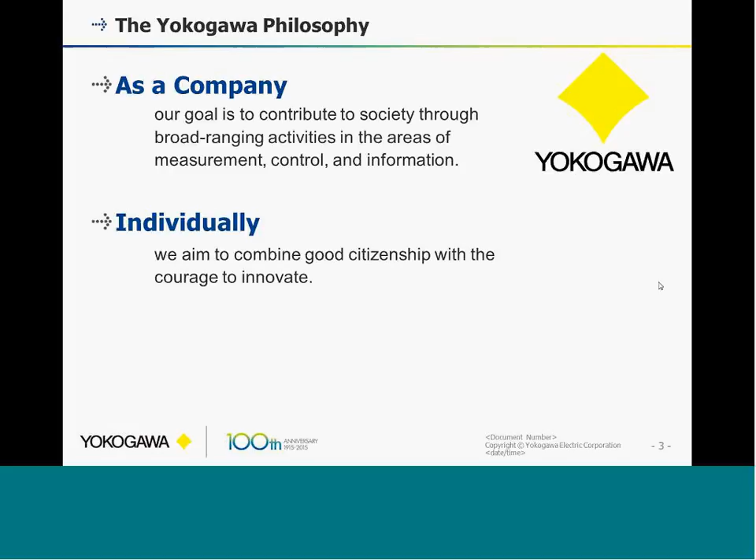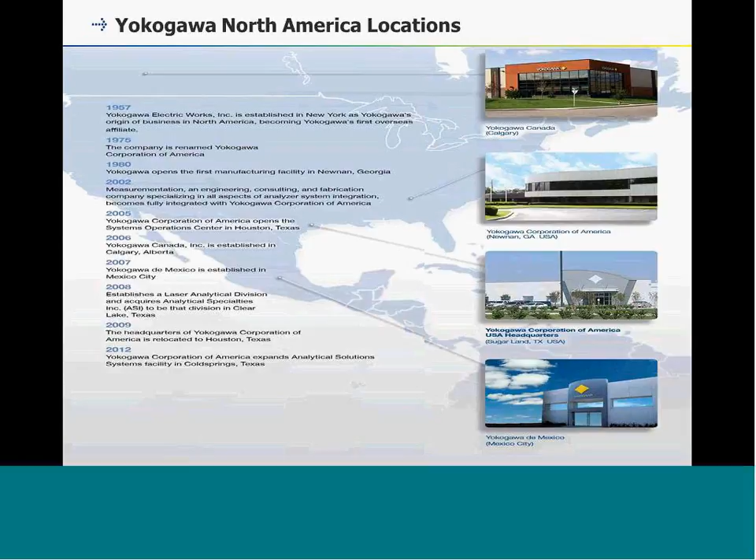Really quick, for those of you who may not know anything about Yokogawa, I wanted to give a brief overview of who we are as a company. Our goal is to contribute to society through broad-ranging activities in areas of measurement, control, and information. Individually, we aim to combine good citizenship with the courage to innovate. We started in 1915, and we operate in 33 different countries through 85 different companies. Within North America, we have 4 headquartered offices: one in Calgary, Canada, one here in Newnan, Georgia, just south of Atlanta, one in Sugar Land, Texas, and one in Mexico City.

Just within the U.S. alone, we have sales offices and people in your backyard all over the U.S., same thing for Canada and Mexico.

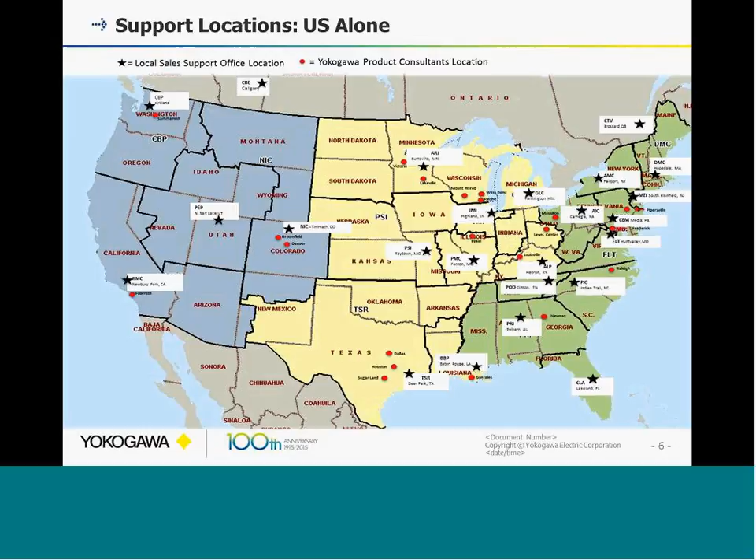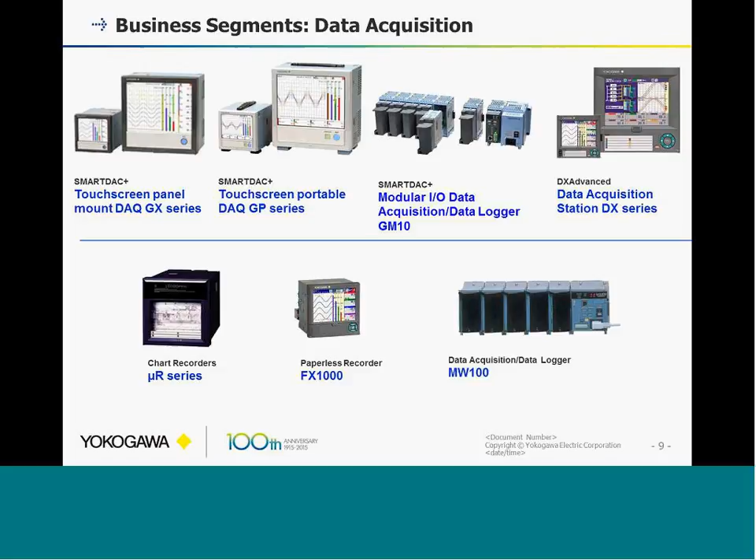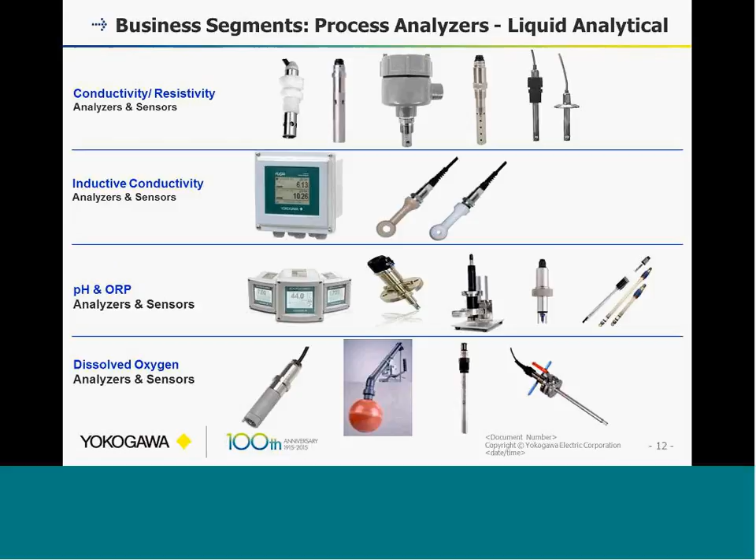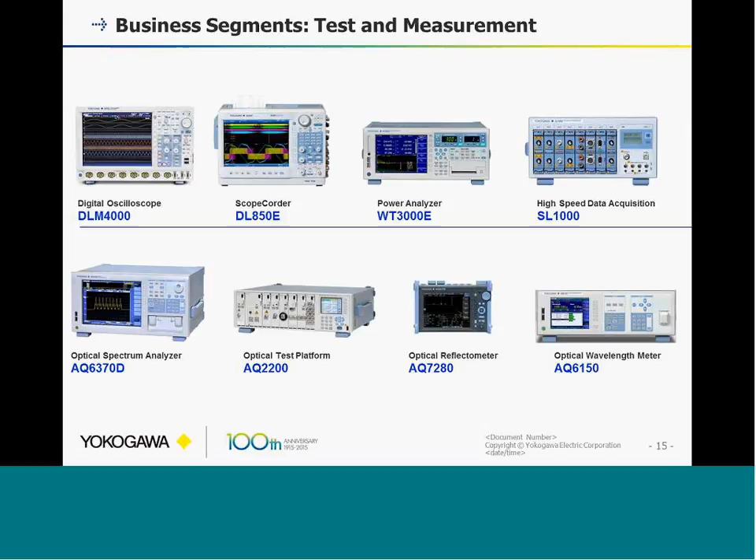From control and safety systems to your field instruments, your pressure and temperature transmitters, to your data acquisition and recorders, to your controllers, to gas analytical like your GCs, your zirconia oxygen, to your liquid analytical, conductivity, pH, dissolved oxygen. We also have a system integration group that builds sample systems called measurementation. We have a semiconductor division, a test and measurement division, and meters with handhelds for your calibrators or your insulators. We have a life science division as well.

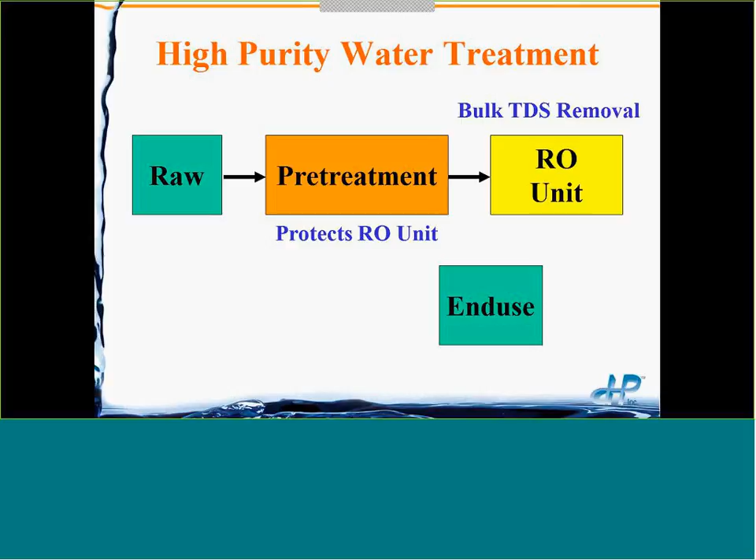But the unit can have problems like scaling, fouling, and chemical attack. So we have to protect the RO unit from those 3 problems, and that's called pretreatment. So pieces of equipment, the treatment steps ahead of the RO unit, are called pretreatment. They're to protect the RO unit from scaling, fouling, and chemical attack. And then if the RO permeate, the water that passes through the membrane, doesn't meet end-use requirements, then we have to polish it to meet end-use requirements.

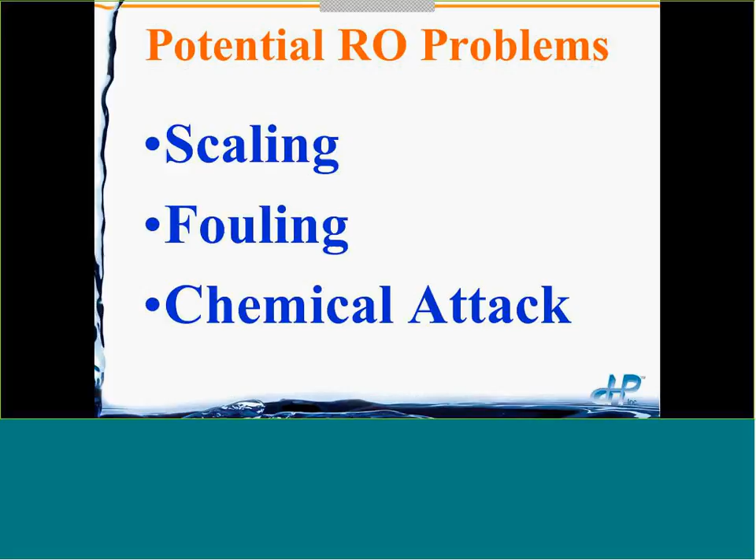And that is going to be the focus of the next webinar. We spoke previously in the two webinars about scaling, fouling, and chemical attack being potential RO problems. We also spent a good portion of the webinar time on monitoring RO units. We're going to monitor normalized permeate flow, and it'll drop for both scaling and fouling. I'm just giving an example here. If you want more information, go back to the previous webinar.

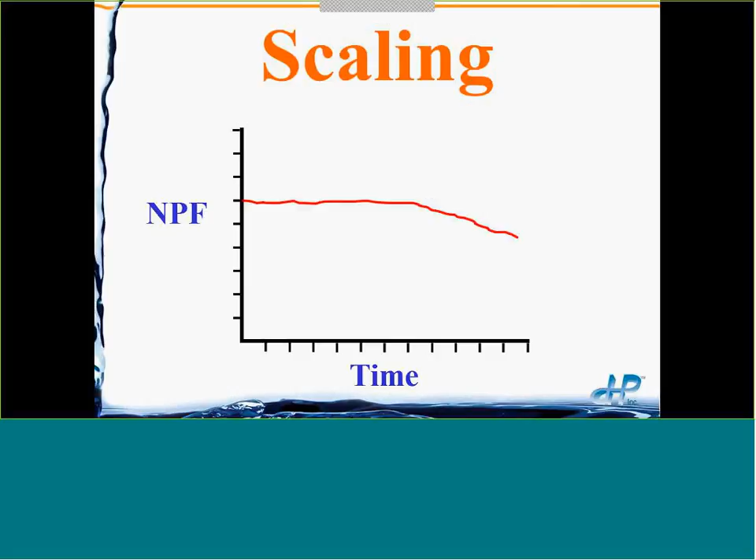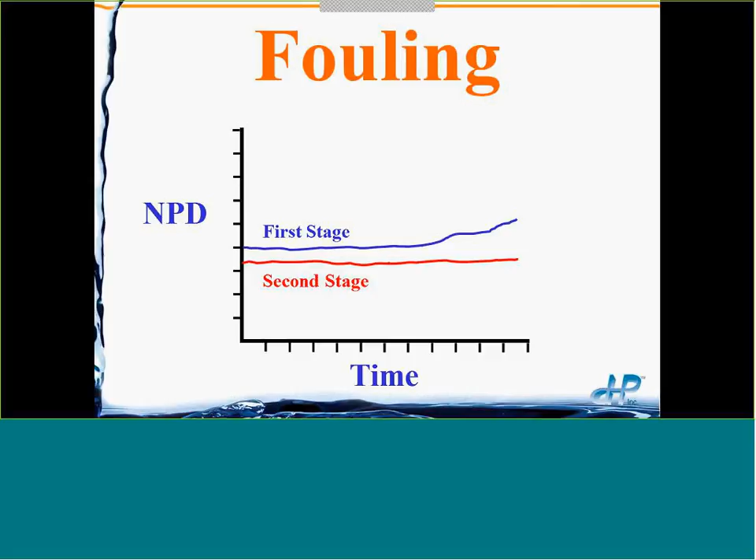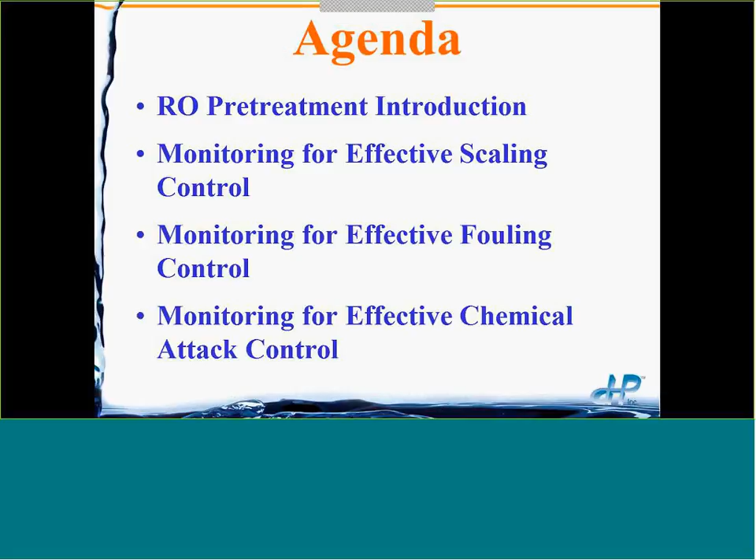Today I'll give an introduction on RO pretreatment, and then we're going to go over monitoring for scaling control, monitoring for fouling control, and monitoring for chemical attack control. RO pretreatment addresses scaling control, fouling control, and chemical attack control, because the purpose of pretreatment is to protect the RO unit from scaling, fouling, and chemical attack.

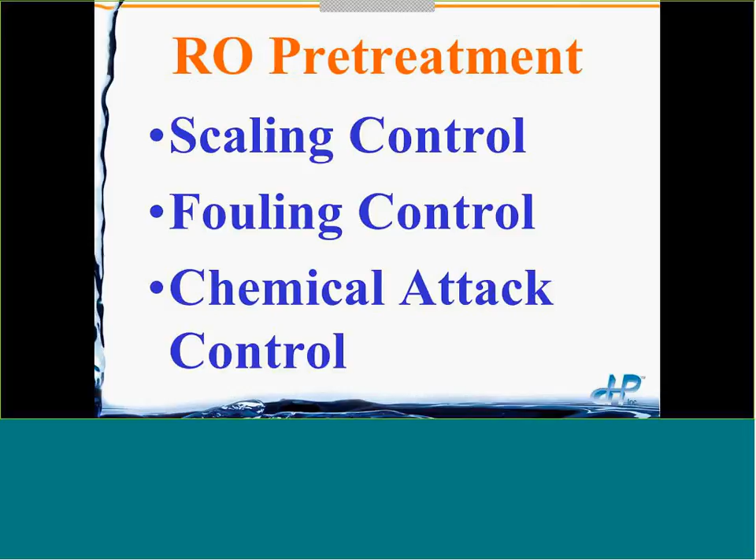So if you have a problem in an RO unit, you can't put blinders on and just look at the RO unit itself. If the unit is having a scaling, fouling, or chemical attack problem, then the pretreatment control really needs to be looked at, and that's the purpose of today.

In doing this monitoring, we would love to see normalized permeate flow as a straight line. That means the RO is operating today the same as when it was new and clean and everything was perfect.

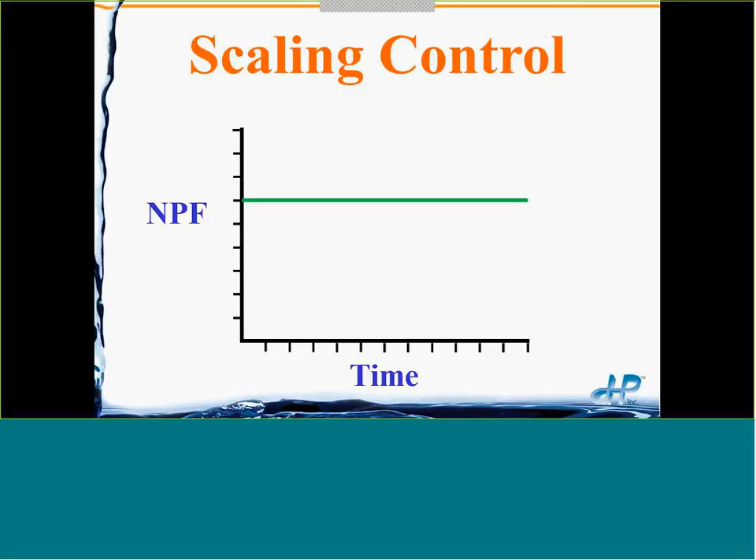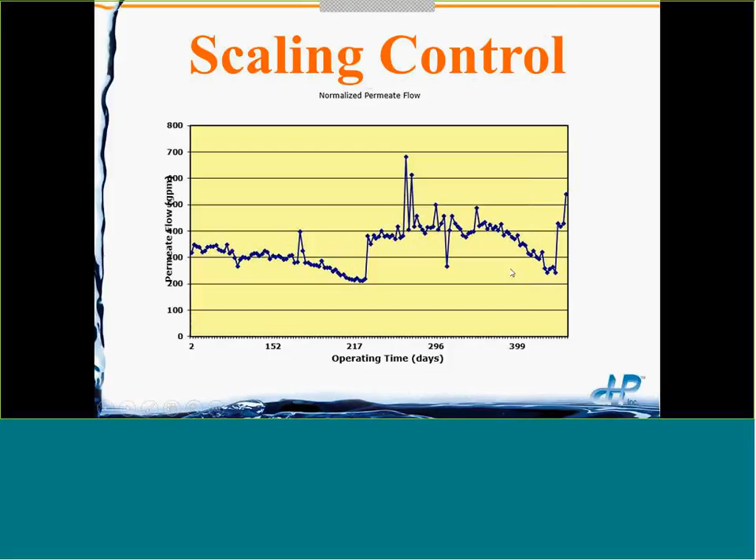But it never is a straight line. It looks more like this. In this case, we're seeing that the performance is dropping, the normalized permeate flow drops, but then we do a chemical cleaning and bring it back. So the line in this case is kind of jagged as scaling occurs, and then you clean it.

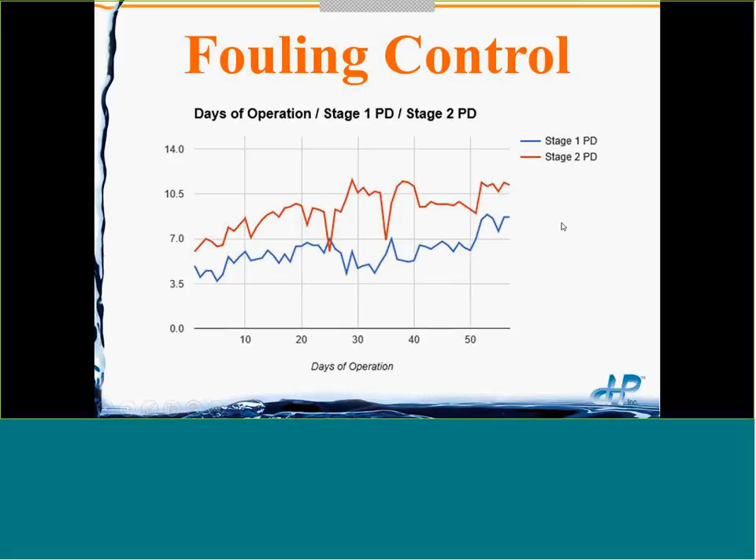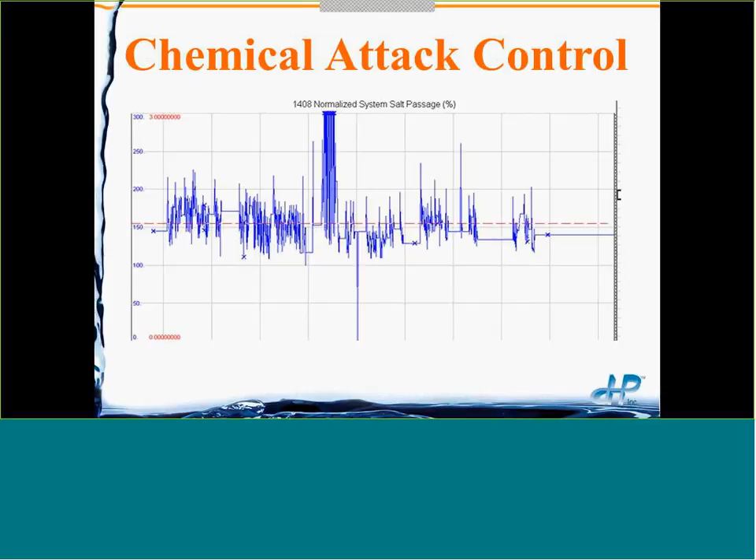For scaling, what are the common pretreatments today for controlling scaling? Acid injection is one, scale inhibitor injection is the most common, and softening is the third. Let's do a couple of slides on each one of these.

Acid injection for a polyamide thin film composite membrane is only for carbonate scale control. For the few that may have cellulose acetate membrane, it's very common that you have to inject acid because you have to have the pH around 5.5, as the membrane itself is hydrolyzed otherwise.

Most common, over 99% of all the membranes we're going to run into are going to be polyamide thin film. If you're injecting acid, you're injecting it for carbonate scale control.

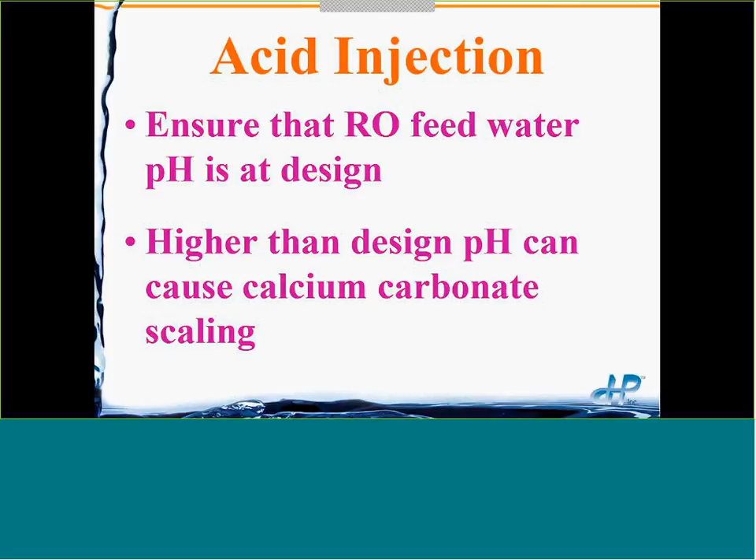The reason we want to do the monitoring and make sure the acid is being injected properly is we want to make sure that pH doesn't creep back up. Because if we have a higher pH than we actually want, that's going to increase the calcium carbonate scaling potential. That's why we're injecting acid, to get rid of the carbonate so you don't have calcium carbonate scaling.

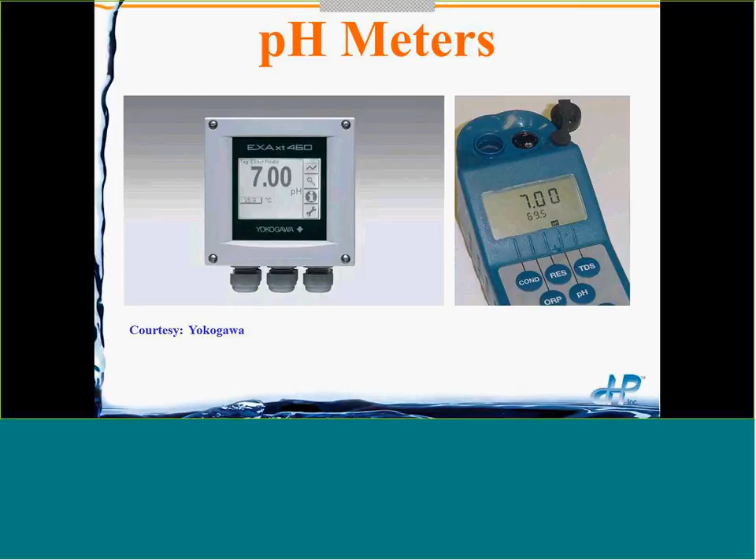So we're going to monitor the pH with on-stream instruments and also verify the accuracy of the on-stream instrument using calibrated handheld instruments. Acid injection is not so common, and it's only for carbonate.

If you have more than a carbonate scaling potential, you're going to have to use either scale inhibitor injection or softening. In this case, we're talking about inhibitor injection.

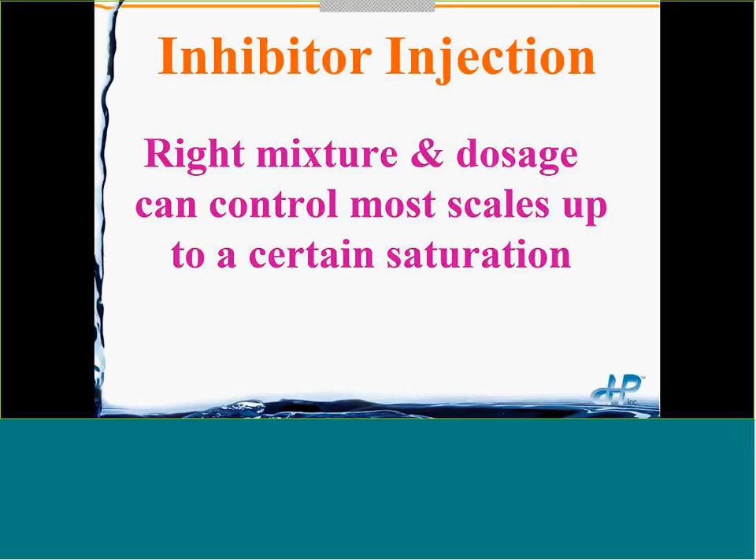Basically, the chemistry is well known, the scaling is well known, and there are many products you can use to control scaling of basically any scaling compound. But they only work to a certain level, a certain percent saturation.

So if you had no scale inhibitor, 100% saturation would be the absolute max. With a scale inhibitor, like for sulfate, maybe you can go to 250 or 300% saturation. But it still won't protect you if you went to 400 or 500% saturation.

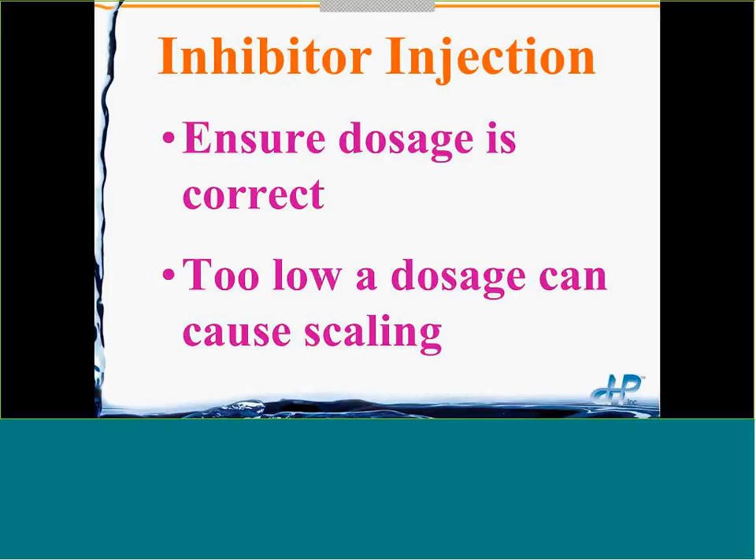As far as monitoring, we want to make sure the dosage is correct, that we're not adding too little. If we add too much, it's going to hurt our pocketbook—it probably won't hurt anything else.

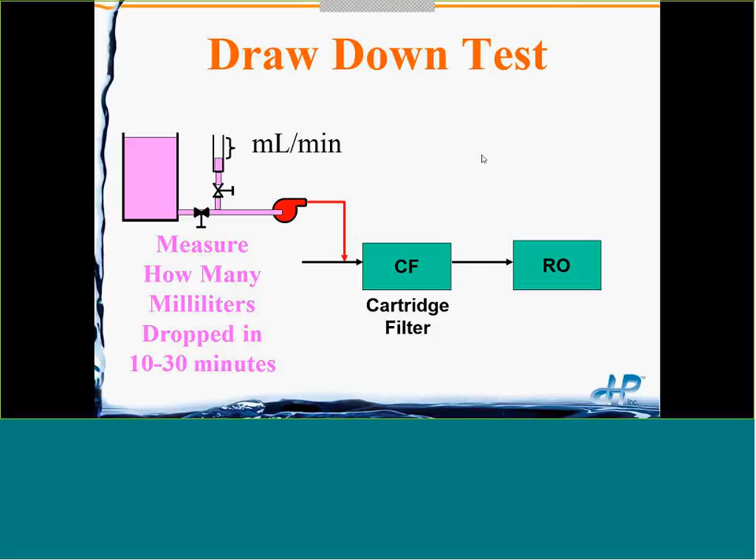So the monitoring for scale inhibitor dosage is a drawdown test where you have a graduated cylinder. You draw from the tank and then close the tank valve, and now you're sucking out of the graduated cylinder, and you can figure out how many milliliters per minute you're injecting, and based on the flow rate to the RO unit, you can determine the dosage. That's the best way for an injection.

The last one is softening, and softeners—everybody's heard of home water softeners. In the old days, they were called sodium zeolite softeners.

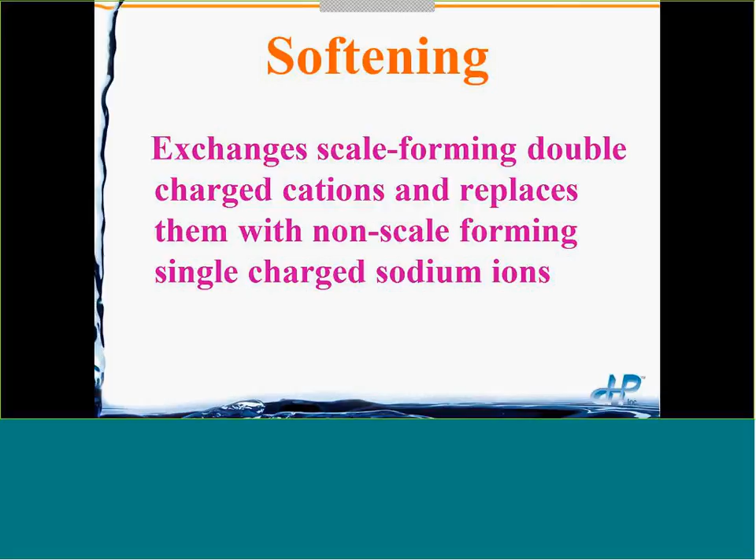These are ion exchange, so you have little beads, ion resin beads, and in this you're exchanging the scale-forming double-charged cations, those positively charged ions, and replacing them with non-scale-forming single-charged sodium ions. That's where you regenerate them with sodium chloride. Getting rid of the double-charged calciums, double-charged magnesiums, those are the main things, but also double and triple-charged ions like strontium, barium, aluminum, iron, things like that.

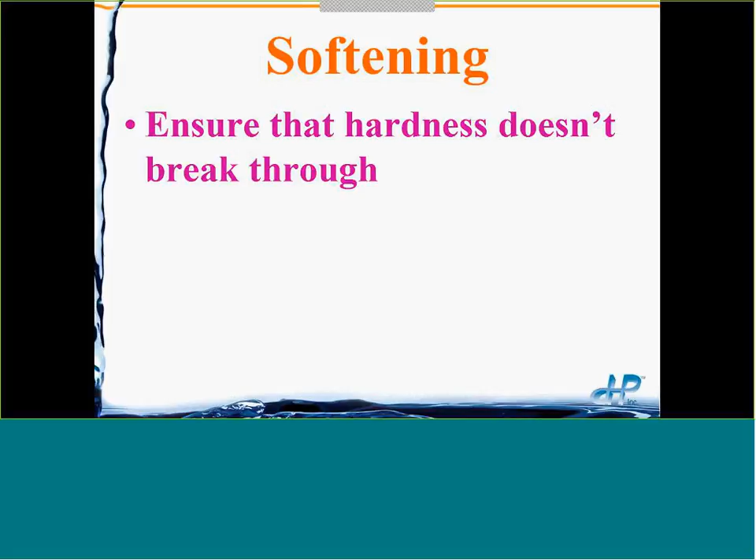As far as monitoring, we want to make sure that we don't have hardness breakthrough of calcium and magnesium, but it's actually the magnesium that comes out first. We make sure that it doesn't break.

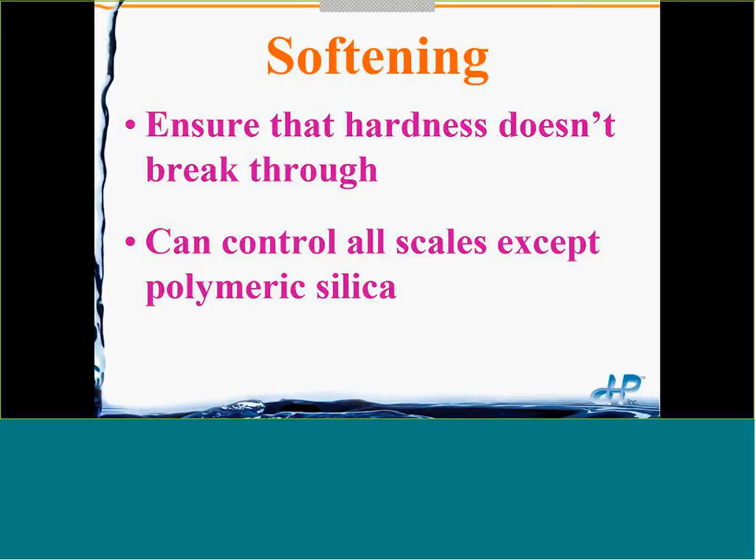The great softeners will remove all or most of the cations, so that you don't have to worry about cation-anion scalants such as calcium carbonate, calcium sulfate, magnesium sulfate, barium sulfate. Because you're removing the double-charged cations and converting them into sodium sulfate and sodium carbonate, and these don't scale.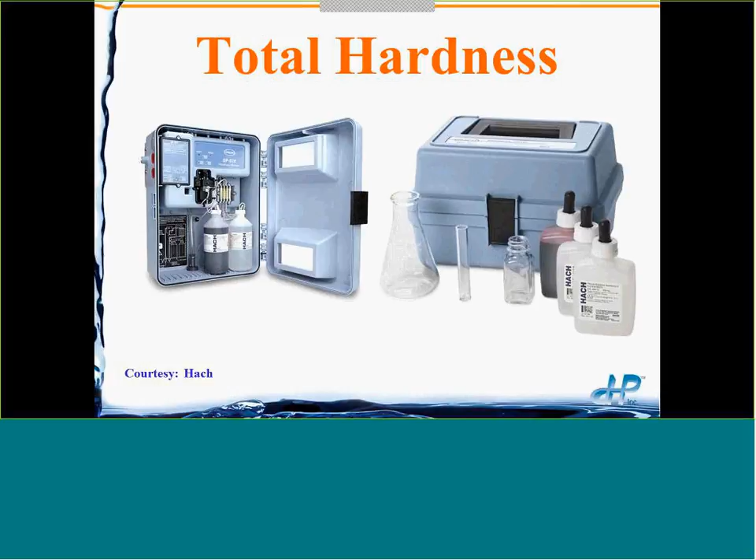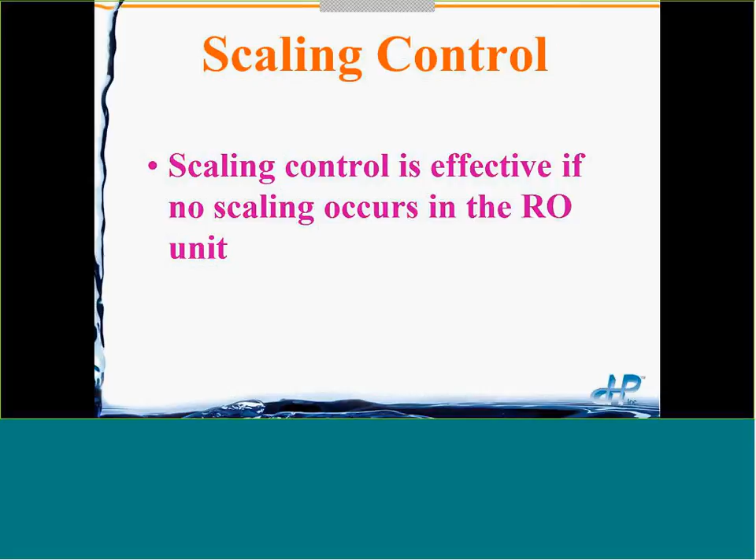Monitor again online. Instruments can be used for total hardness, and you can verify the accuracy of the online reading with benchtop analytical equipment. So you know your softening is effective if you go year after year with no scaling occurring in the RO unit.

Fouling is typically the biggest or most frequent problem that we see. So I'm talking about three different pretreatment technologies: media filtration, cartridge filtration, and membrane filtration, ultrafiltration.

For the media, there may just be one medium, sand. Usually it's on a bed of gravel. Here we're seeing coarse and fine sand and anthracite, so this is a dual media.

The dual media filters are great. The anthracite is ground fairly large, so it can remove larger particles, and the sand is a finer grind but denser, so when you backwash, the sand drops to the bottom and it can pick up smaller particles.

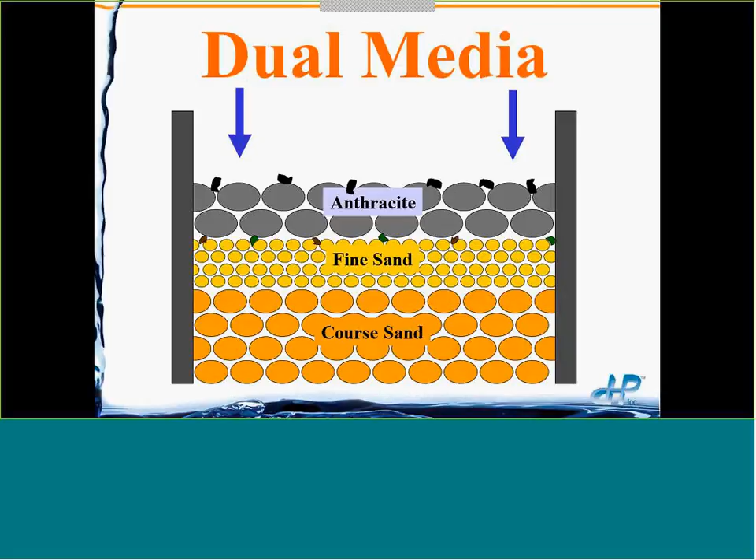Sometimes you have a third medium, garnet, which is very, very dense, so when you backwash it goes to the very bottom. Then you can filter out even smaller particles in the garnet layer, and again usually all on a bed of gravel.

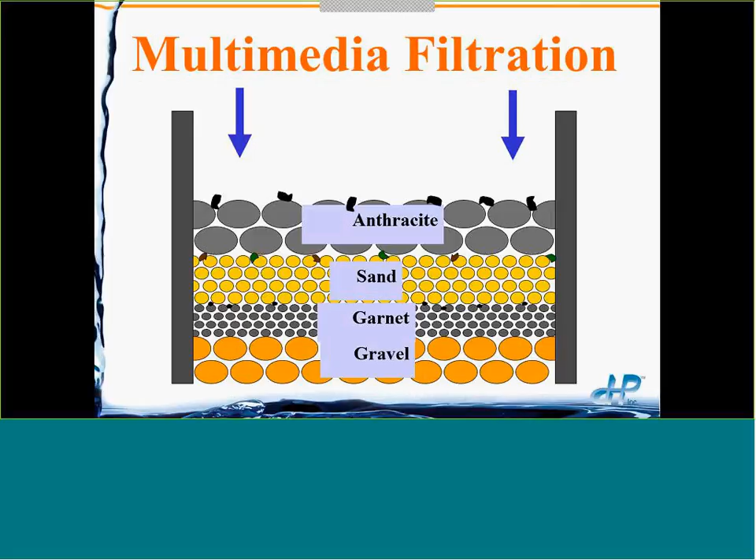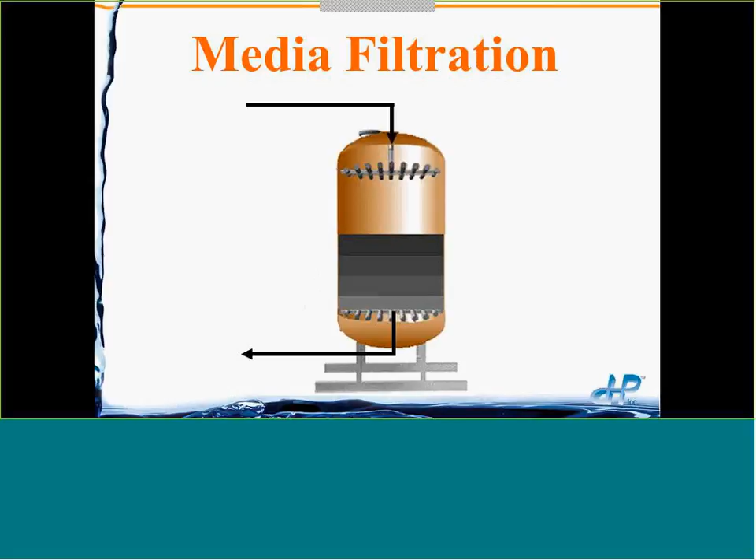Filters will have some sort of distribution system on the inlet and some sort of distribution system on the outlet. The most common setup is downflow media filtration.

What we want to monitor here is pressure drop, and pressure drop is a function of flow rate. So at the same flow rate, we want to monitor the pressure drop, and if it gets above a predetermined level, then we want to do a backwash.

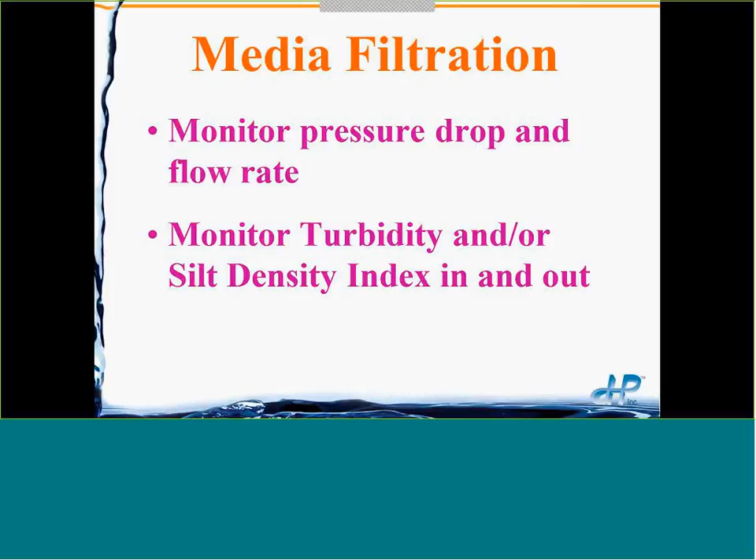To monitor the effectiveness of particle removal, we use turbidity in and out, to see how well particles are being removed, for RO units in particular as pretreatment. We can also use silt density index, and we're going to go over that later in this program.

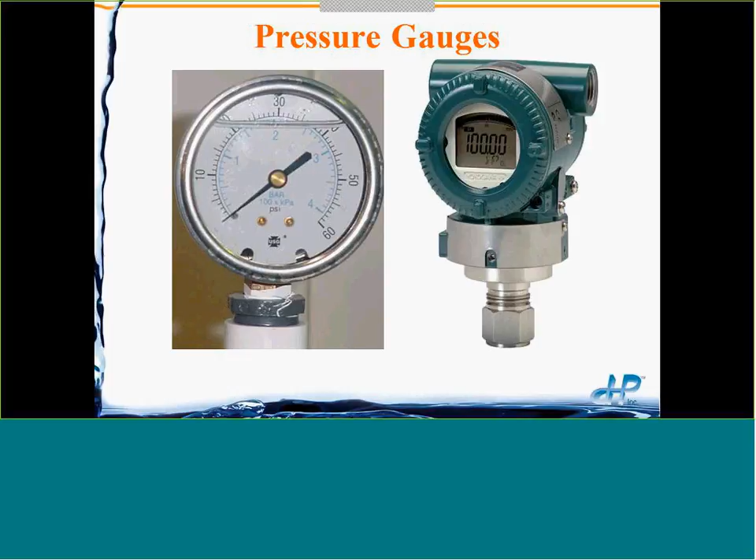As far as pressure gauges, they could be just indicators like we see on the left, or they could be indicating controllers or transmitters like we see on the right. Same thing for flow meters.

Filtration, you may just call it a pre-filter, but this is common, usually 1 to 5 micron, with 5 micron being most common. Sometimes you'll see 10 micron as well. The wound or the melt-blown cartridges are the most common we see.

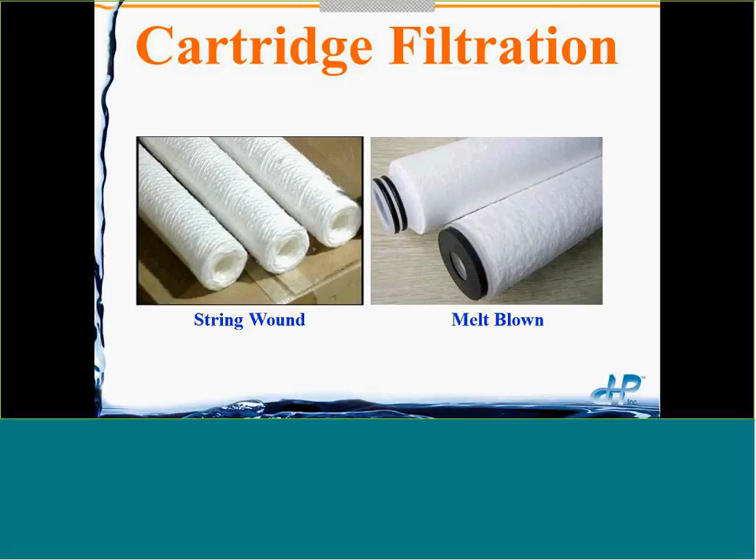This is usually the last treatment step before the high pressure pump, although there may be a chemical injection downstream of the cartridge filter. Like any other filter, we want to measure pressure drop and flow rate.

At a given flow rate, we monitor the pressure drop, and when it reaches a certain level, then we're going to change out the cartridge filters.

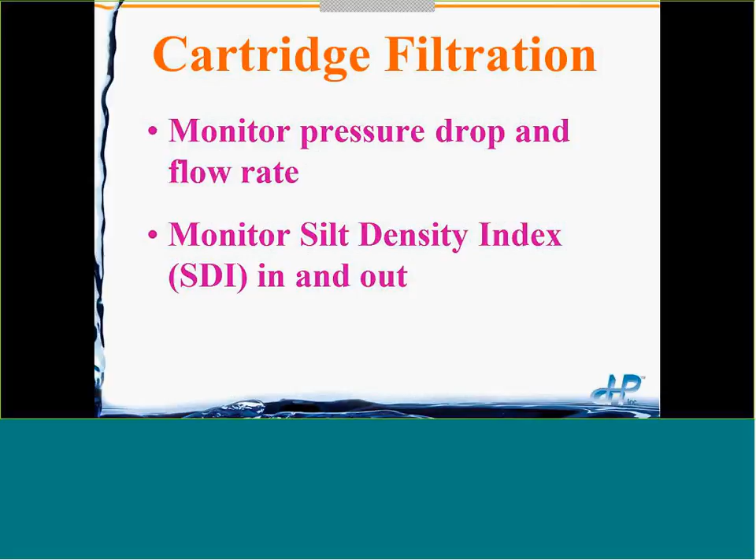Particularly for the warranty of RO membrane elements, we have to make sure that the SDI feeding the RO membrane elements is below what the manufacturer warrants.

Now, especially in the last 5 to 10 years, it's becoming more and more common to put membrane filtration as pretreatment, instead of a multimedia filter, or even sometimes instead of a clarifier and multimedia filter.

Membrane filtration is either microfiltration or ultrafiltration, with ultrafiltration having smaller pores than microfiltration.

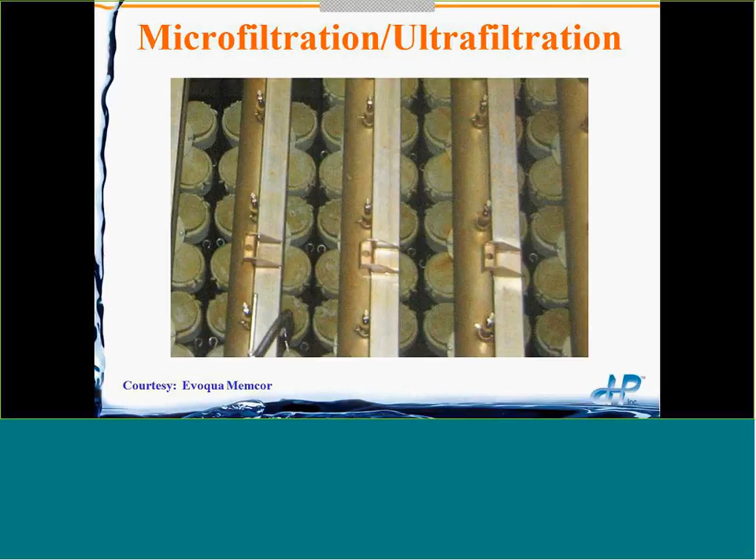So we're seeing here submerged filtration modules. Submerged means that they're vacuum driven. If you see the modules in pressure vessels like here, then that's called a pressurized filtration system.

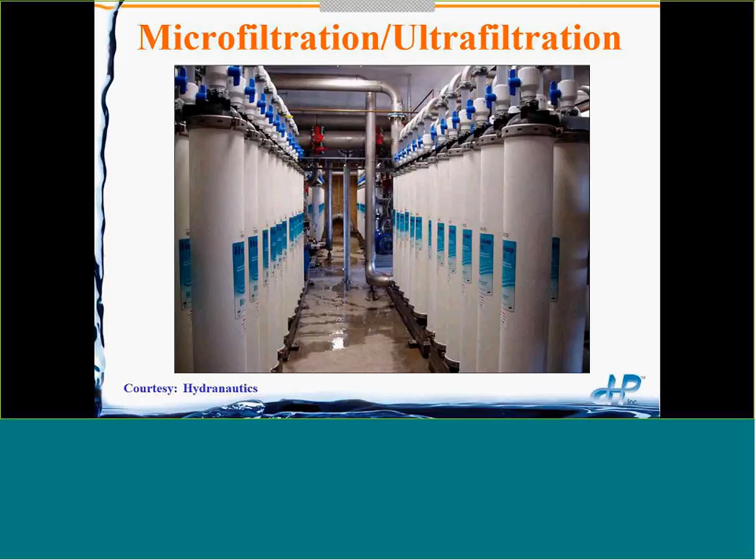But whenever we're talking about filtration, we're going to look at pressure drops and flow rates.

Specific to membrane filtration is a term called transmembrane pressure, which is the difference between the feed pressure and the filtrate or permeate pressure. It's common to use either term for the water that passes through - let's call it either filtrate or permeate.

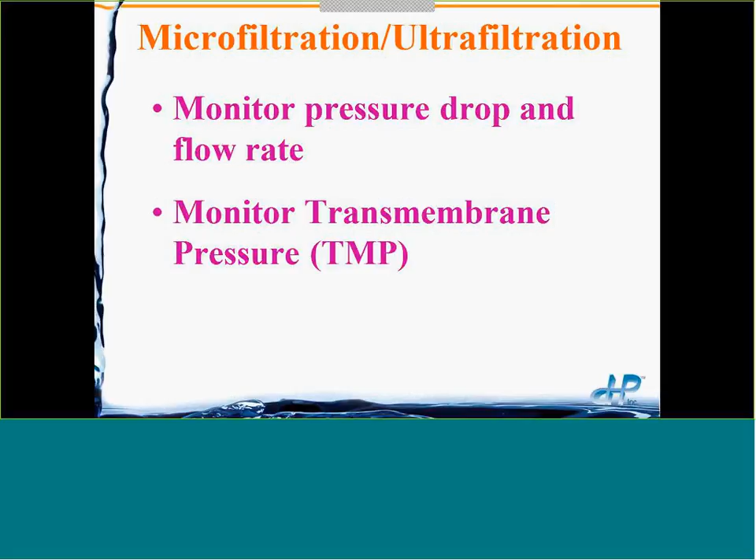So when the transmembrane pressure gets high, in addition to doing backwashes fairly frequently - it could be every 20 minutes to every hour or two - we're going to do chemically enhanced backwashes and occasionally chemical cleaning, CIP, cleaning in place.

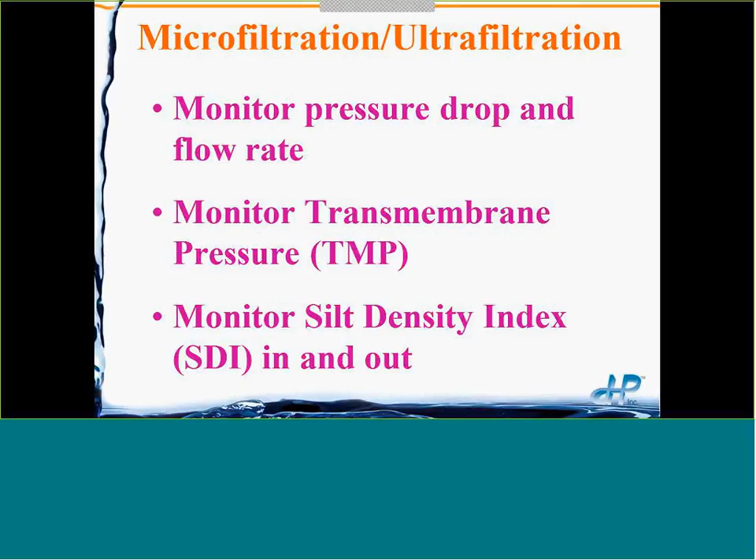The thing to make sure is that we have good numbers for silt density index coming out of the membrane filtration. So let's take a minute or two here on silt density index, SDI.

After we've done everything we're going to do, all the treatment has been done, we head to the high pressure pump ordinarily. Then we're going to measure the fouling potential of this water using a 0.45 micron membrane filter that goes into a filter housing. We keep 30 psi, just a hair more than 2 bar of pressure, the entire time during the test, with a pressure regulator to make sure we stay at 30 psi, and an isolation valve.

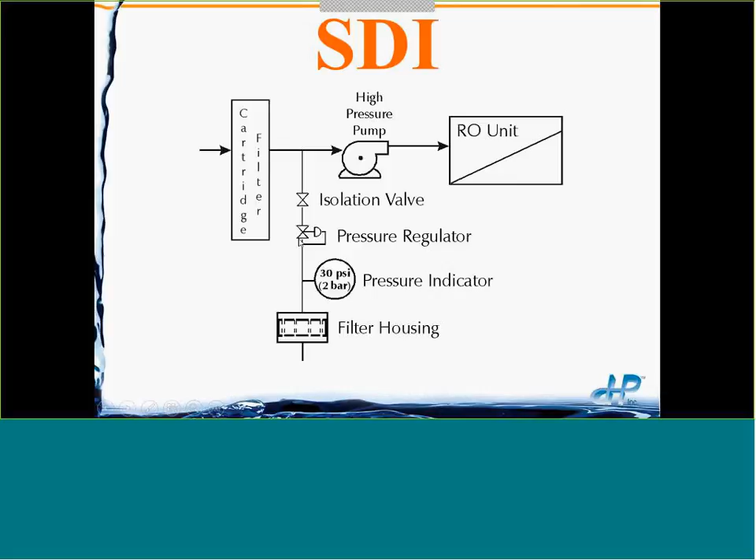This silt density index gives us a measurement of the fouling potential. It's a 15-minute test. The standard membrane manufacturers want is a 15-minute test, and the SDI has to be less than 5. But in reality, you want an SDI less than 3.

There you can buy automated SDI units where you just have to hook it up, put in the pad, push a button, and come back 15 minutes later.

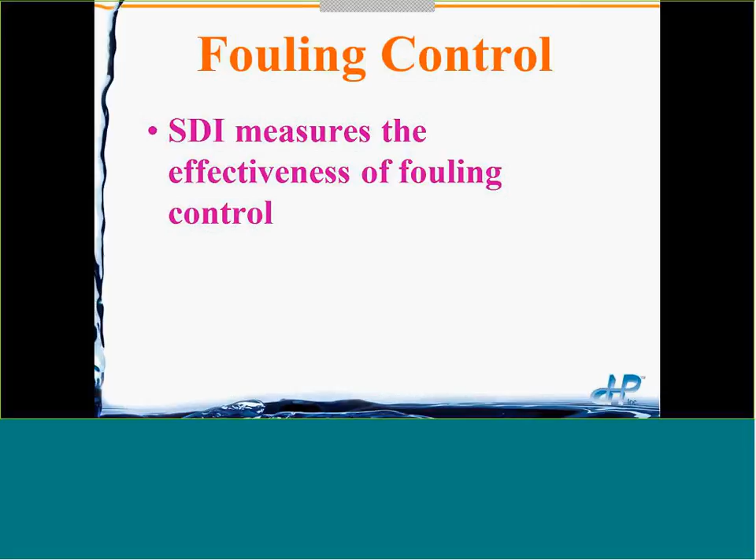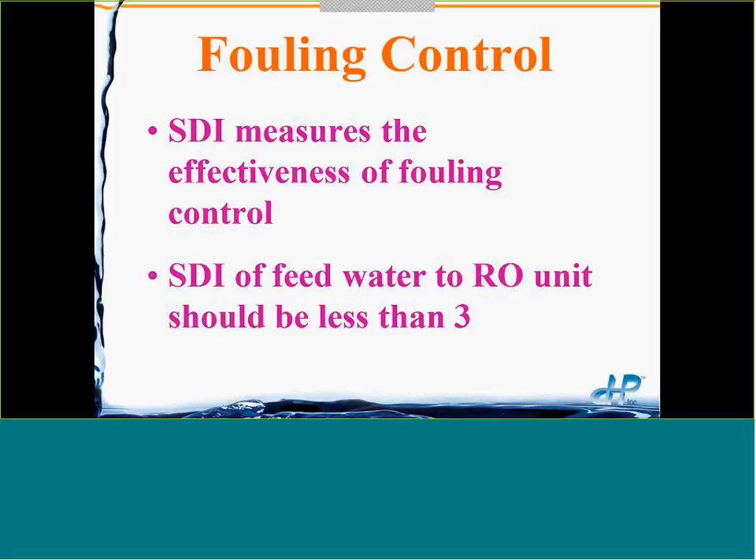Today's SDI test really measures the effectiveness of your fouling control. We can talk about a lot of different things, but in the real world, if you can consistently get an SDI of less than 3 out of your pretreatment system, then we're going to say that pretreatment system is adequate. It doesn't mean you won't have any problems with the RO unit, but the pretreatment system is good with an SDI of less than 3.

And then chemical attack control. There are 3 common ways: the 2 more common ones are activated carbon and sulfite injection, and then a newer one I don't see as much is ultraviolet irradiation.

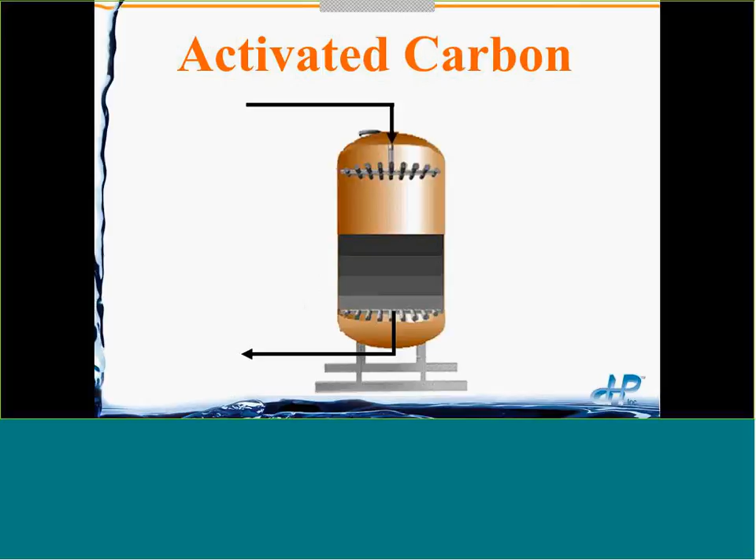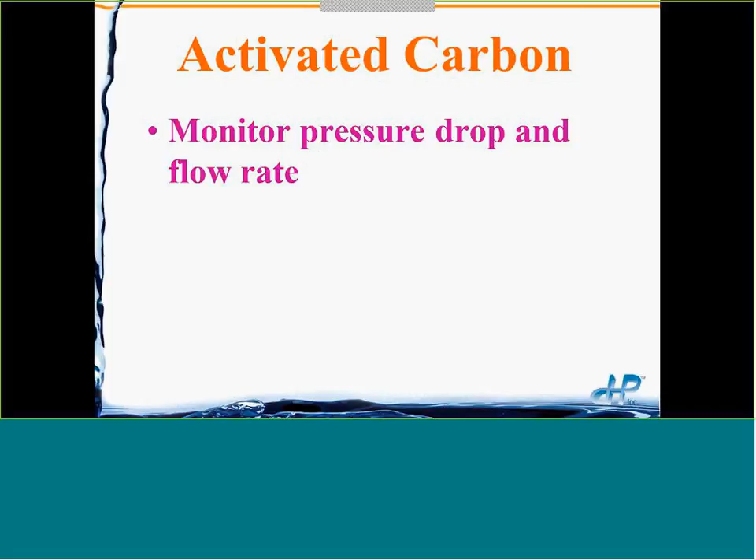Activated carbon, just like in a media filter, is a bed. It's going to have inlet piping, outlet piping, and we're going to be measuring pressure drop and flow rate just like any media bed. Same thing would be true for a softener, multi-media filter, activated carbon—anything that has media in it, we're going to measure pressure drop and flow rate.

But since activated carbon is chemical attack control for chlorine—and any oxidizing agent can destroy the polyamide membrane—we want to measure either total chlorine or measure the oxidation reduction potential.

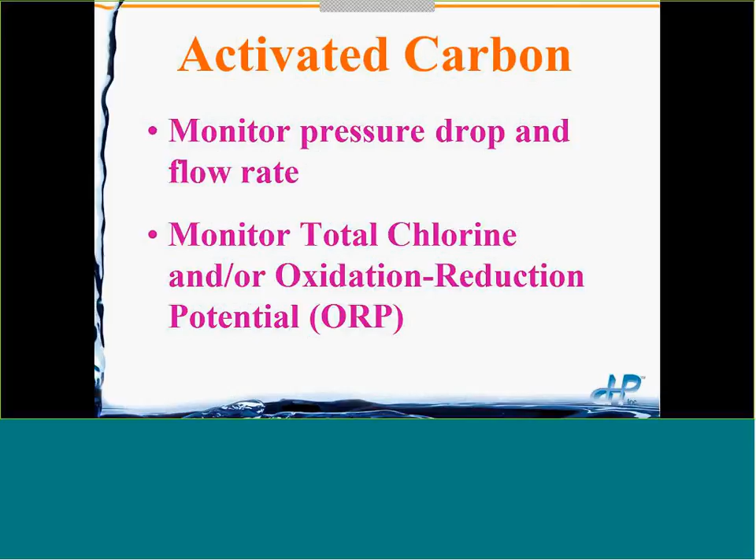Oxidizing water wants to take electrons, so oxidizers like chlorine take electrons from molecules in the RO membrane that we need. When the oxidizing agent takes those electrons, it breaks the bonds, and now the RO membrane can't reject as well. So an oxidation reduction potentiometer, or meter, measures whether a water is oxidizing, wanting to take electrons, or reducing, wanting to give away electrons.

A compound that wants to give away electrons is called a reducing agent, and sulfite is one of the most common. So SO3^2-, that's the actual reducing agent. How you get your sulfite anion, the negatively charged ion, is up to you—you can use sodium sulfite, sodium metabisulfite. There are 5 or 6 different chemicals you can use, but sodium sulfite and sodium metabisulfite are the most common.

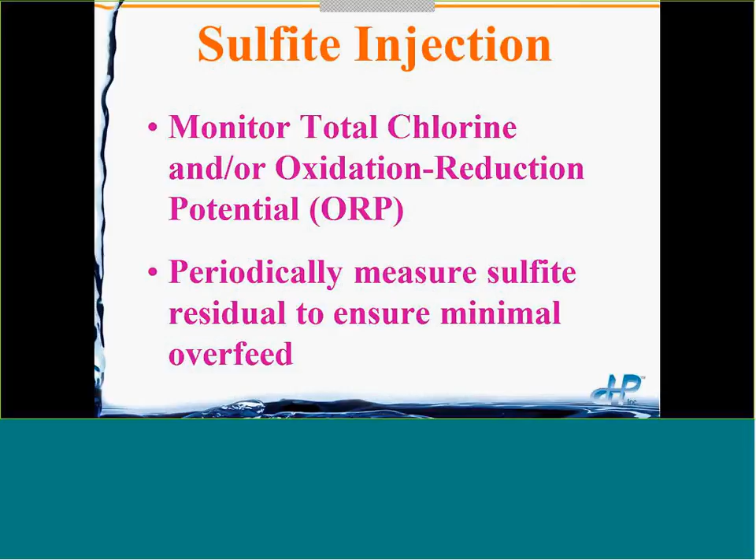So the last one is UV dechlorination. There are certain wavelengths that can break up the bonds in your chlorine compounds. It's common to use a 254 nanometer lamp, either low pressure or medium pressure. You can dechlorinate—you can remove the chlorine, you can destroy it with UV.

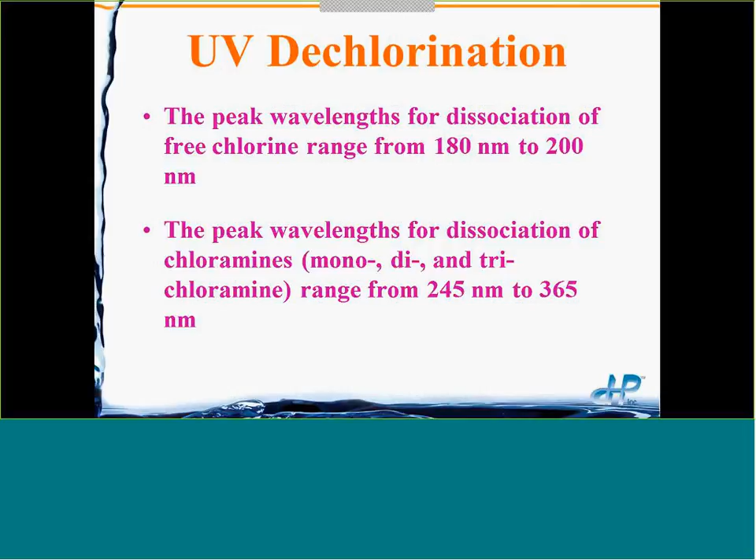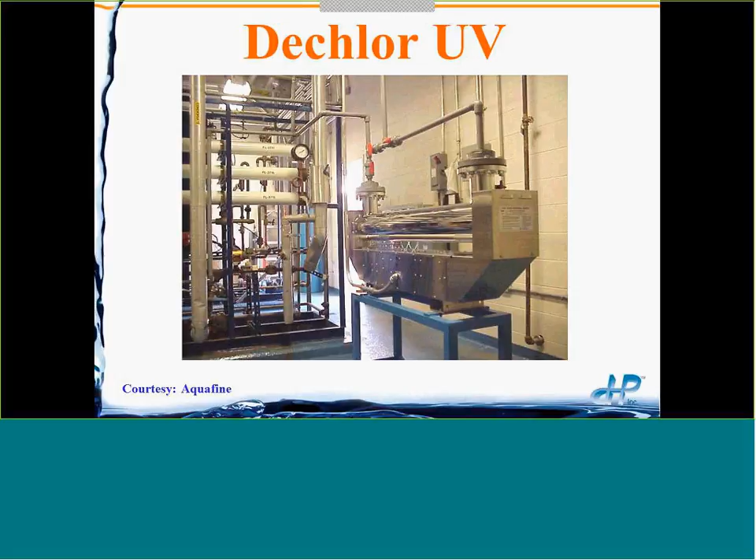So monitor UV dechlorination—again, we want to make sure we have zero total chlorine and the oxidation potential is below a predetermined set point. We use both handheld and on-stream instruments for the total chlorine measurement.

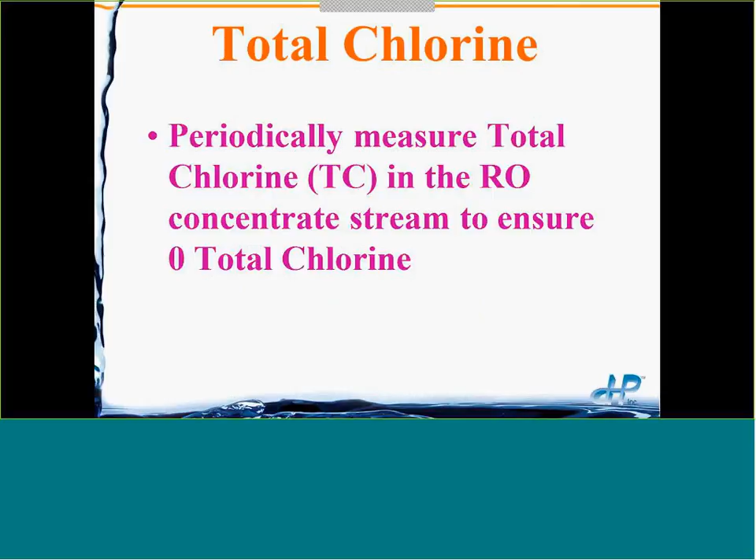We want zero total chlorine. That way we know we're not going to get any trouble. We also recommend that occasionally you check the concentrate total chlorine. Everybody checks the total chlorine in the feed water if they have chlorine upstream.

But it's not common to check the total chlorine on the concentrate, though it's a good idea. Say you have a 75% recovery RO unit, that means your feed water is concentrated 4 times. So if you're reading 0.02 milligrams per liter of total chlorine in the feed water, it's tough to tell if that's zero or not. You periodically check it in the concentrate stream. If you get 0.02 in the feed and 0.02 in the concentrate, okay, you really didn't have 0.02. But if you have 0.02 in the feed and 0.08 in the concentrate, that indicates you didn't have complete dechlorination and it's been concentrated in the RO unit.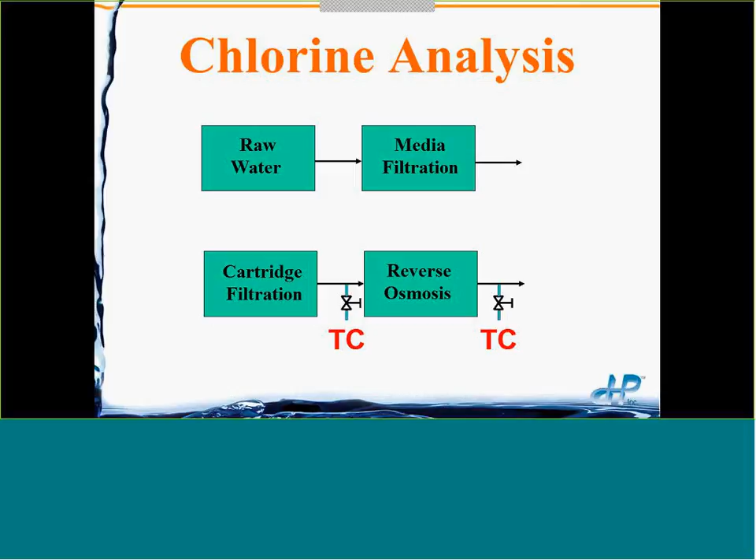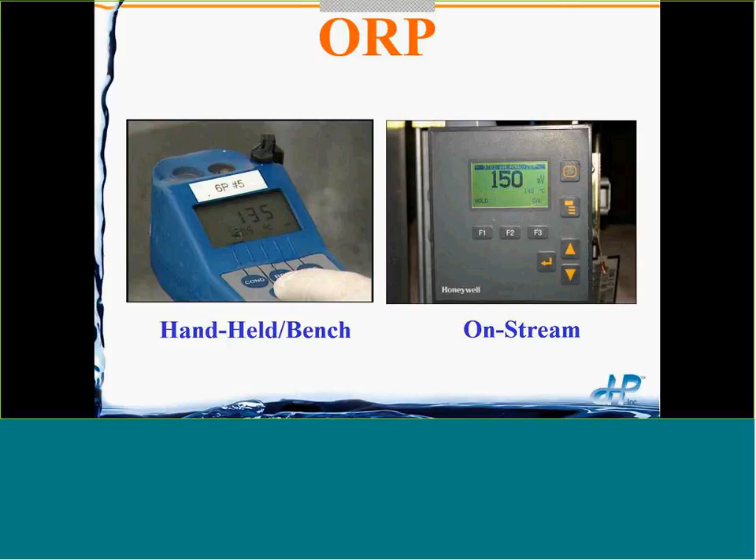And after a year and a half, 2 years or so, you'd damage the membrane in that last element and have to replace it. So again, ORP measures whether water is reducing or oxidizing, and oxidizing water damages RO units. We have both handheld and on-stream instruments for ORP measurement.

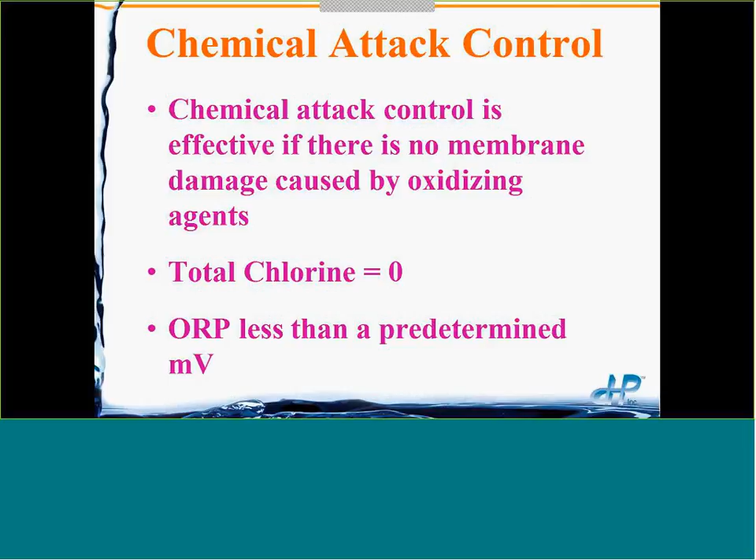This is a monitor for when you're going to have an effective chemical control and pretreatment system. You go year after year and you don't see any oxidation damage of the membrane. If you have no oxidizers in the feed water, then you should not have damaged membrane. So aim for total chlorine of 0, just in case you have iron rust particles in the water, because even small amounts of chlorine in the presence of iron can burn out the membrane pretty quickly.

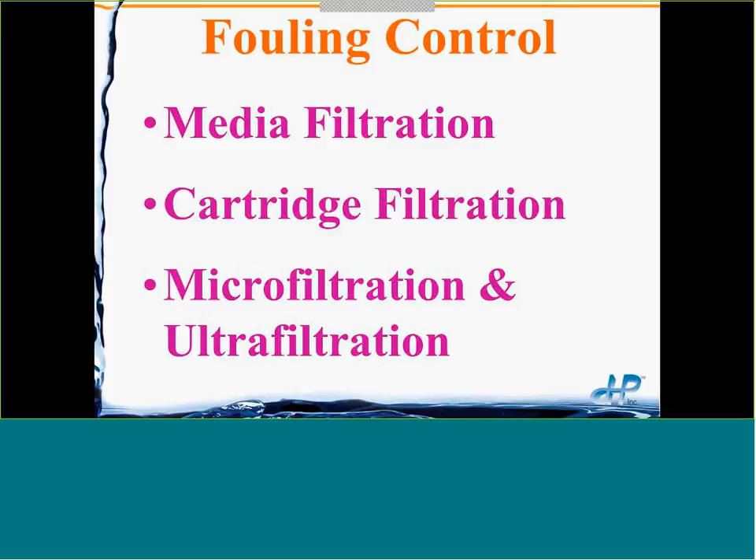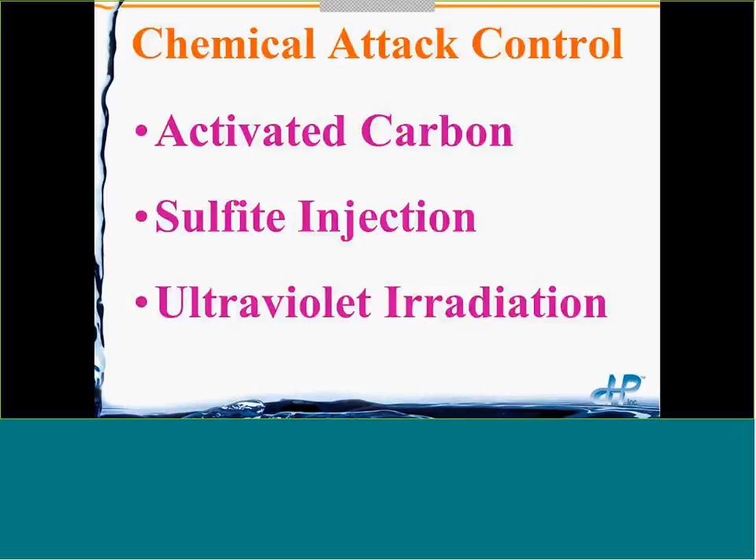So, summary and conclusion: we looked at the common pretreatment methods plus monitoring for scale control, including acid injection, scale inhibitor injection, and softening. We did the same for fouling control, looking at 3 common pretreatments: media filtration, cartridge filtration, and microfiltration and ultrafiltration. And then finally we covered 3 common ways to address oxidizing agents to prevent chemical attack of the membrane: activated carbon, sulfite injection, and ultraviolet irradiation. So thank you very much, and we'll open this up to questions.